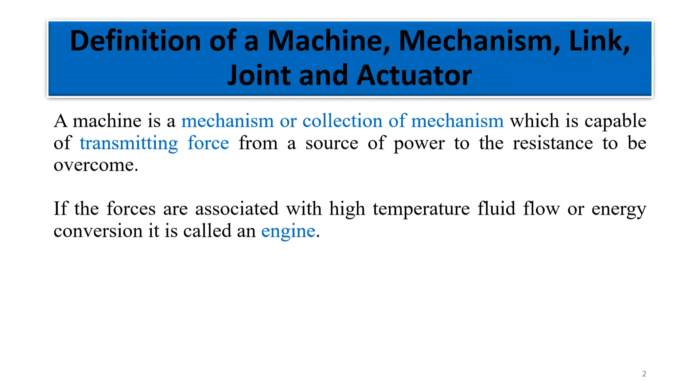Now, what is a mechanism? We have looked at the definition of a machine, and we said that a machine is basically made up of a collection of mechanisms. A mechanism can be considered to be a rigid part. And if we say a rigid part, we are saying that the body doesn't deform. Your basic mechanics. So any rigid body doesn't deform. And they are not only rigid bodies, but they are arranged and connected such that they can produce the desired motion of the machine.

Mind you, we said that the machine has one or two mechanisms or a collection of mechanisms to transfer power from one source to the other. Now, a mechanism, we say, is rigid parts that are arranged and connected such that they can produce the desired motion of the machine. That means that every machine is designed for a particular purpose. So if the purpose of the machine is to move a vehicle forward, then the mechanism should be able to carry out that purpose. We don't design mechanisms for design's sake. Whatever we design has a particular function that it must perform.

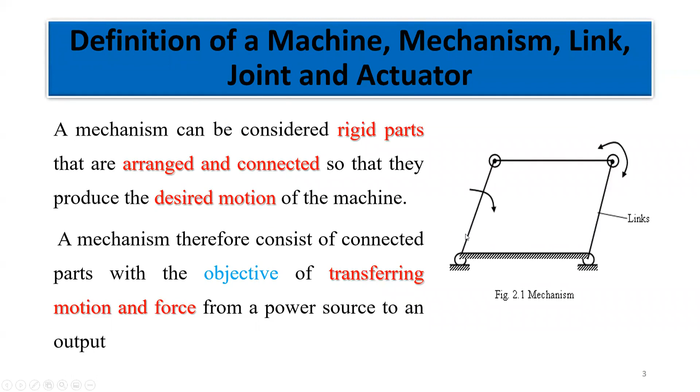We say a simple link is a rigid body that contains only 2 joints, which connect it to another link. E.g., a crank, which is able to complete a full rotation about a fixed point. So for this one, if we say from this point up to this point is the only link that we have, then this is called a simple link. But if you consider the other links in addition, then we say it is a complex link.

So a complex link is a rigid body that contains more than 2 joints. The main difference between a simple link and a complex link is the number of joints available. If you count the number of joints and you have 2, then you can say this mechanism has simple links. If you count the joints and they are more than 2, then this mechanism has complex links connected together.

So examples of motions are sliding. When we say sliding, an example is a piston in a cylinder. When we talked about engines, we said we have pistons that are reciprocating. When we meet on Friday, I will try to bring a simple engine for us to look at and see how that mechanism works. So on Friday, we'll look at what a piston is.

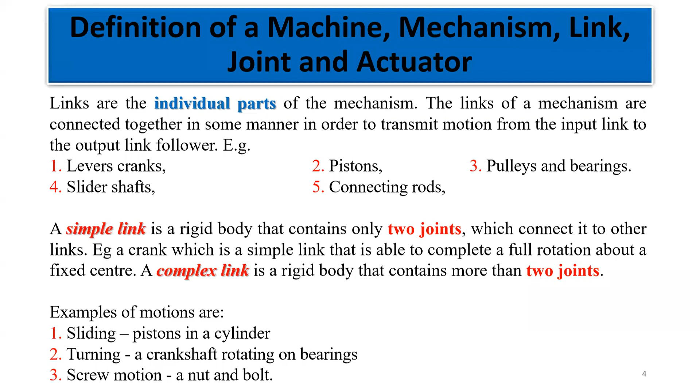Another one is turning. An example of turning motion is a crankshaft rotating on bearings. We also have screw motion, and an example of that is a nut and a bolt. So all those are examples of motion. So on Friday, we'll look at what a piston is, what a crankshaft is, and how those are connected to achieve the desired motion in engines.

So we have talked about the fact that a link is made up of two types: the simple link, which is made up of two joints, and the complex link, made up of more than two joints. So we look at what a joint is, so that if we are told to classify a link, we can easily know. Because if you know a joint, then we can know whether we have two joints, three joints, 4, 5, and so on and so forth. So a joint is just a movable connection between links that allows relative motion between the links.

Joints are divided into two. We have the primary joint, which we can also call the full joint. And then we have the higher order joint, which we can also call the half joint. The full joints are divided into two.

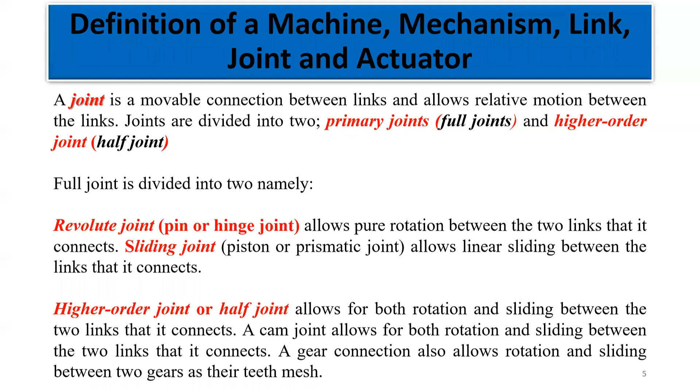So let's move on to what we call a linkage. We say a linkage is a mechanism where the links are connected to form a chain with one of the links fixed.

And we also define a mechanism as a connection of rigid links to perform or transmit motion or a force. So if we have a mechanism where one of the links is fixed, then we have what we call a linkage. Now the fixed link is called a frame, because it exhibits no motion, and it serves as the reference for the motion of all other parts.

Yes sir, please, Wanda was asking a question: is the actuator the energy producing component or the rotation producing component? We say the actuator is the one that produces the energy. So it means that any component producing the rotation in the mechanism is not actually the actuator. That energy will be transferred to the links, so the links are the ones that are going to produce that rotation, sliding, and all those things.

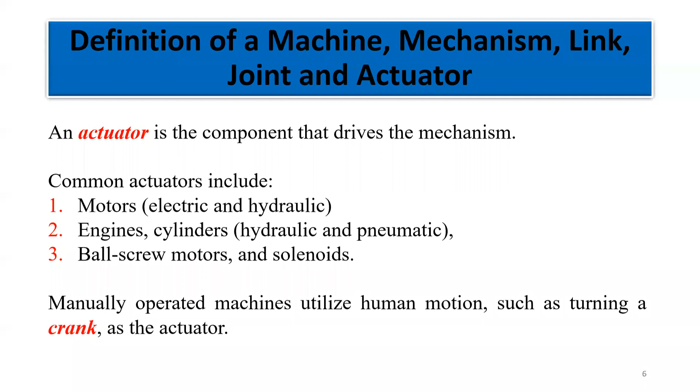So we say for a linkage, it's a mechanism where various links are connected together to form a chain. So if we look at figure 2.2, for instance, this one we are calling a slider crank chain.

The component one are the fixed points or fixed mechanism, so these ones are called the frame. Now component 4 is the slider. It is sliding on component 1.

And then component 3 is called the connecting rod. And then component 2 is what we are calling the crank. So this is a kinematic diagram of an engine.

The crank rotates, and when the crank rotates, it causes component 3 to oscillate. And because component 1 is fixed, component 4 will begin to slide back and forth. So you realize that it will be moving back and forth, back and forth.

Now, an example of a linkage is the slider crank mechanism, commonly used in petrol engines or internal combustion engines. So if you look at your vehicles, then we have a mechanism that we call a slider crank mechanism there. Without that mechanism, there's no way the vehicle can move.

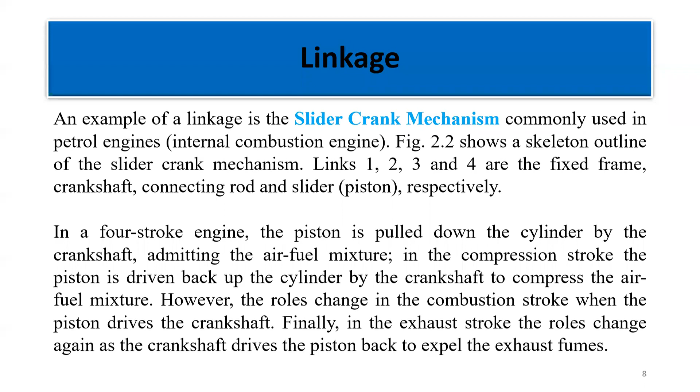So that is basically what we mean by the slider crank mechanism. On Friday when we meet, I will show you a typical example of a slider crank mechanism, and we'll quickly look at what I have explained here - practically what we mean by the intake stroke, the combustion stroke, the compression stroke, and then the exhaust stroke.

Another type of linkage is what we call the 4-bar chain. A 4-bar chain is what is shown on the right-hand side of the slides. The 4-bar chain consists of 4 links, with link 2, 3, and 4 being movable as link 1 is fixed.

So anytime you see a line with inclined lines beneath it, then we say those ones are fixed. Then link 2, 3, and 4 are now movable.

Figure 2.3b shows the 4-bar chain operating as a double lever mechanism. An example of a double lever mechanism is what we call the windscreen wiper. Those of you who have seen the wiper of a vehicle realize that it moves side to side. The mechanism driving that windscreen wiper is what we call the 4-bar chain, or the double lever mechanism.

Link 2 and 4, their lengths are constrained so that they can only oscillate backwards and forward, whereas the wiper is moving side by side. A practical example is the windscreen wiper.

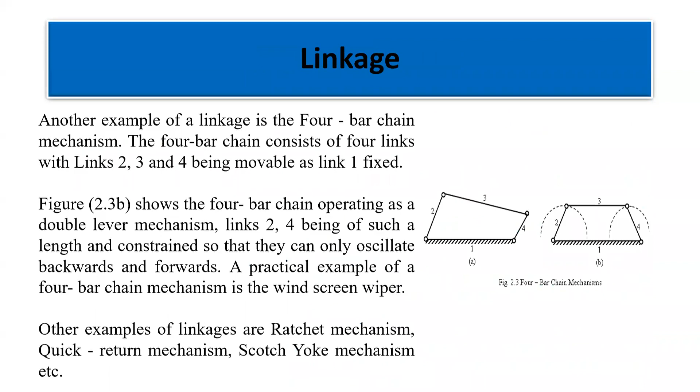And then we have what we call the cam mechanism. But before we move on to the cam mechanism, for the slider crank mechanism, you realize that we were saying link 1 is fixed. We can as well fix link 3, and then fix link 2. Those ones will give us different mechanisms - we'll look at it when we move forward.

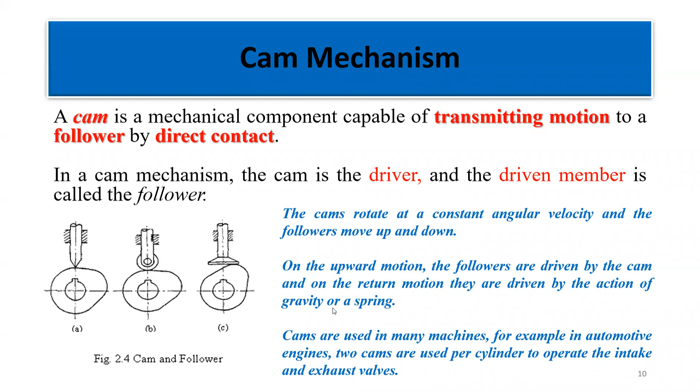So we have what you call classification of cam mechanisms. Now we say CAM mechanisms can be classified by their input and output motion, the configuration and arrangement of the follower, and the shape of the CAM.

The follower configurations in Figures A to D are named according to their characteristics. So we say Figure A is a knife edge CAM mechanism, because if you look at this follower here, it is shaped as if it is a knife. That's why we are calling it a knife edge CAM follower.

Now if you look at B, you realize that the follower is shaped like a roller. So we say it is a roller CAM mechanism. And if you look at figure C, the follower is shaped like a flat surface. So we say it is a flat faced CAM mechanism.

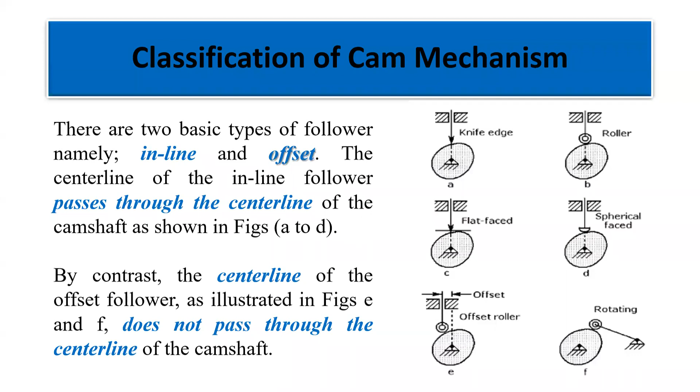An offset follower. If you look at E and F, you realize that the center lines are not in line. So we say they are called an offset follower. So we say the center line of the offset follower does not pass through the center line of the camshaft. So basically, those are the two types of followers that we have: the inline follower and then the offset follower.

So we say followers are typically spring loaded to maintain constant contact with the shaped surface of the cam. But gravity constraint is still an option. Huh? But normally we don't want the follower to drop by gravity. We want to have control, right? So we normally prefer the spring loaded. So the spring will control the movement of the follower.

Any question on the cams before we move on to the gears? Hello? Hello? Hi. Yeah, I'm asking if there's any question on the cams before we move on to the gears.

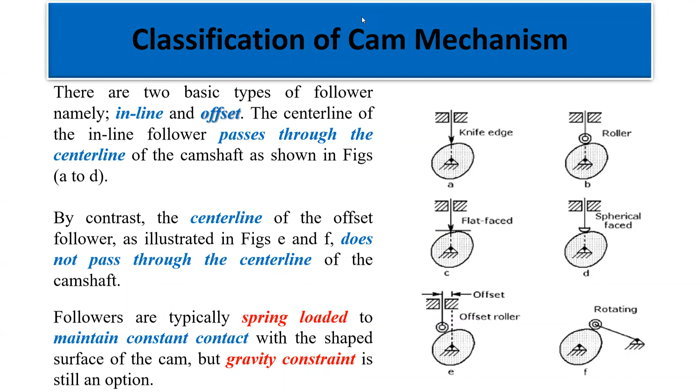Okay, if there's no question, then we say gears are used to transmit rotary motion and power from one shaft to the other with a constant angular velocity ratio. Gears have the advantage of providing positive drive without slipping, and permit high torques to be transmitted. Furthermore, gears are adequately lubricated to operate at remarkably high efficiency over a wide speed range. Gears can be used between shafts that are parallel or inclined towards each other.

And when gears are in mesh, we say the bigger one is called a wheel, and the smaller one is called the pinion. So basically, when we say you want to transmit rotary motion or power from one shaft to the other, then the most efficient one is what we call the gears. Even though we have a belt and pulley there, the belt and pulley we say have some losses. It is not as efficient as the gears.

Because with the gears, there's nothing like slipping. But with the belt, we have what we call slipping. And that slipping reduces the efficiency at which the motion can be transmitted. And then when we want to transmit high torques, we say we go for gears. And then another advantage is that whether the shafts are parallel or inclined, you can go for gears. But with the pulley and belt, that flexibility is not available. So gears are very, very important when it comes to transmission of rotary motion.

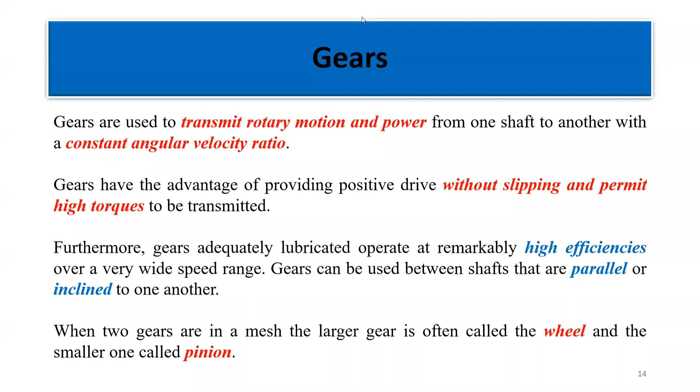Now, this is what we mean by parallel shaft, inclined shaft, and the non-intersecting shafts. So these are examples of gears in mesh. In some cases, the desired reduction in angular velocity is too great to achieve using only two gears, so several gears are connected to give a gear train. And you will say that gears can be used to transmit higher torques. In cases where these are very huge, you can't only use your two gears, you must combine the gears. So we can have as many gears as possible.

And that is what is used in the gearbox. If you pick a gearbox, you realize that it has so many gears in mesh. Because maybe the torque or the speed is very high, and the speed that we need to drive the mechanism is too low. So you see, for us to achieve that, we use the gears to reduce the speed that is coming from the actuator.

And the actuator can either be an engine or it can be a motor. So if the speed coming from the motor or the engine is too high, then we use what we call a gear reducing gearbox. We reduce the speed up to the speed that we want. If that is done, then we can actually use it for driving our mechanism.

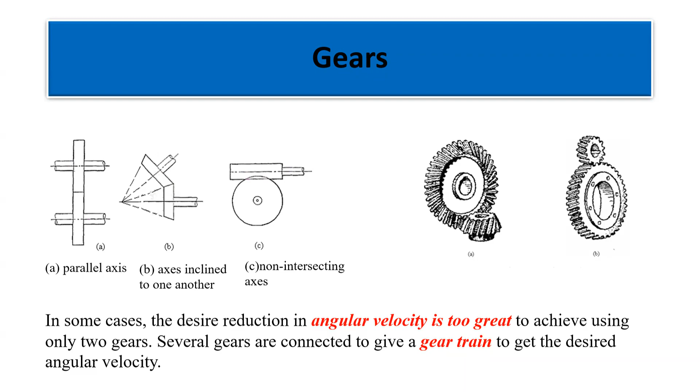And then basically we have so many types of gears.

Please, someone wants to join. Oh, I've admitted all of them now.

So we say the spur gear is used to transmit motion between two parallel shafts. So for instance, in this figure, if you draw a line through the axis of the shaft, you realize that the center lines are parallel to each other. If we have such a case, then the best option is what we call the spur gears.

And then we also have what we call helical gears. That one is used when we want to transmit motion at an acute angle rather than at 90 degrees. Rather than at 90 degrees. So if you look at this one, for instance, if I draw a vertical line through the axis, the angle is 90 degrees.

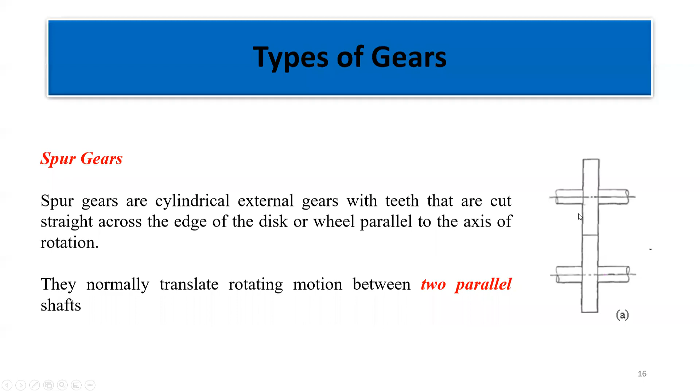Now if... hey, too quiet. Who is that?

So we say that teeth of the helical gears are cut at an angle rather than parallel to the axis.

That boy, you're making noise.

And these ones help in reducing the noise. And also help in having...

Hey, those talking. Who are those? Can you please mute all of us? That boy, you're making noise. And you're mute.

Yeah, so if we want a reduced noise, then we go for helical gears. If you want a smoother drive, then you go for helical gears. And if you want your gears to have a prolonged life, then we go for helical gears, as well as driving heavy loads. Because these teeth are cut at an angle, we say these helical gears produce what we call an axial force component on the shaft bearing.

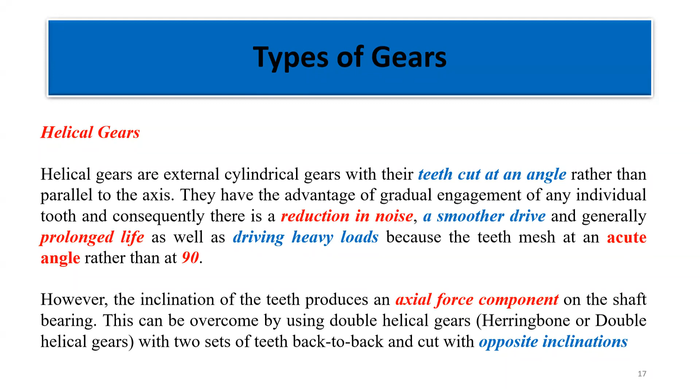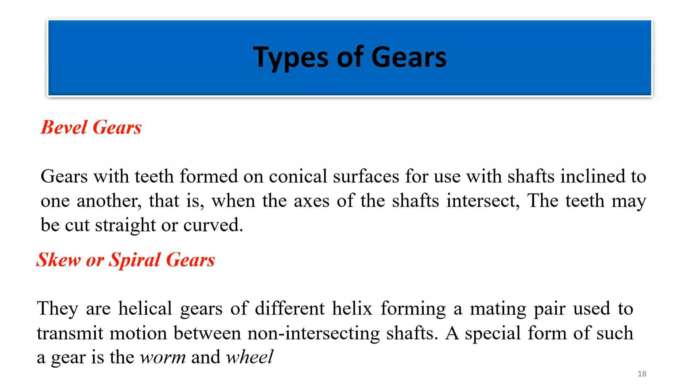So in order to overcome that, we have what we call herringbone or double helical gears. If we have such a mechanism, it means that the teeth are cut opposite to each other. So those forces will cancel out, because if one is positive, the other one will be negative. So they cancel out, and we eliminate the axial force component.

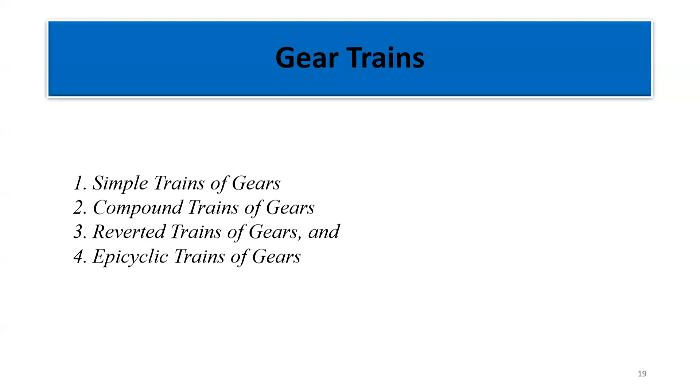And now we speak about trains. If we say gear train, it means that we have a number of gears in mesh, like in the gearbox. So we have a simple train, compound train, reverted train, and epicyclic trains. A simple train, we say each shaft has only one gear. It's called the simple gear train.

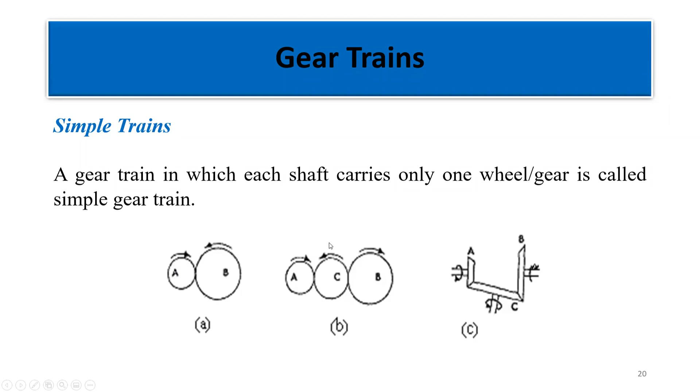So if we have a number of shafts, and each shaft is carrying only one gear, then we say we have a simple gear train. Gear A has only one shaft, and there's only one gear mounted on it. The same for gear B. For this one too it is the same, and those ones in 3D form, this is how it looks.

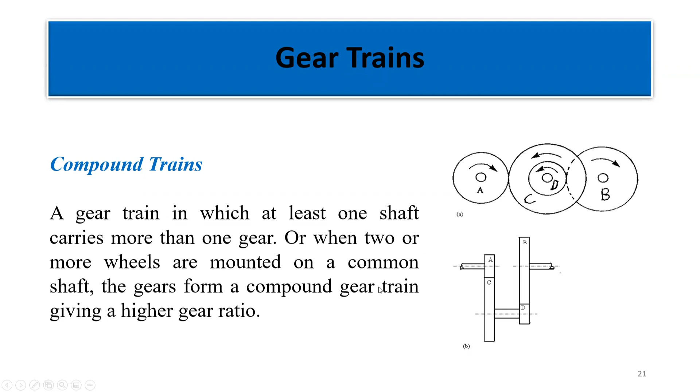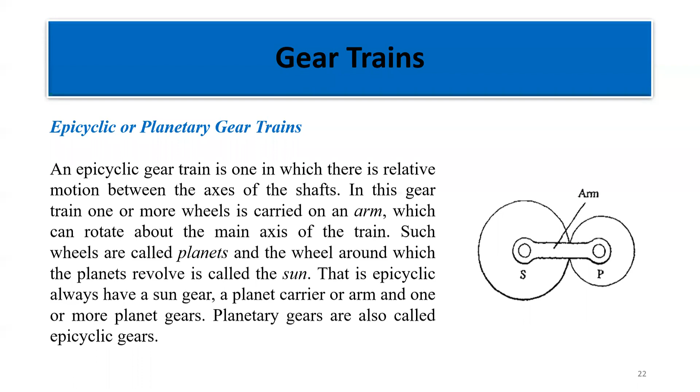So if you look at the solar system carefully, I think those who invented this one looked at the solar system, how the solar system operates, and then they used that same knowledge in designing the planetary gear trains. And if we talk about compound planetary gear trains, then it means we have a lot of them mounted in the mechanism.

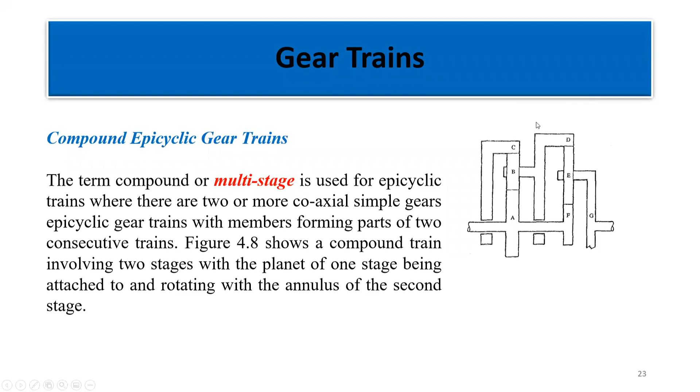Hello, sir. Yeah, hello.

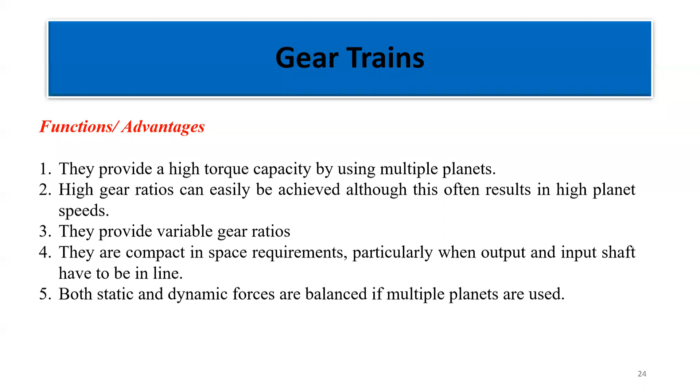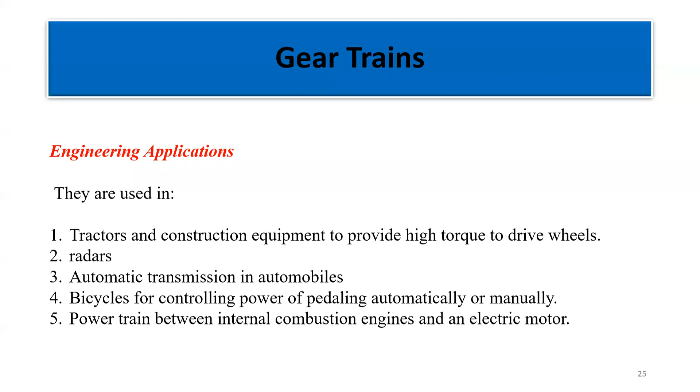And then some engineering applications are tractor and construction equipment, automatic transmission in automobiles, bicycles for controlling power, and then powertrain between internal combustion engines and an electric motor.

Sir. Hello, sir. Yeah, hello. Please, the gears, are they classified according to their functionality or the geometry of their respective teeth? Normally, we look at the teeth for its classification. And then sometimes even how the shafts are mounted. You see whether the shafts are inclined to each other, whether they are at right angle, whether they are at acute angle, whether they are parallel to each other. All those are the various ways of classifying gears.

So we say kinematic inversion. So if, for instance, one link is fixed, and then we decide that fixed link we are going to unfix, and then we fix another link, then we say we have done what we call inversion. So in the use of mechanism, a link which was originally fixed is now allowed to move. Another link becomes fixed. Then the mechanism is said to be inverted. The inversion of a mechanism does not change the motion of its links relative to each other, but does change their absolute motion relative to the ground.

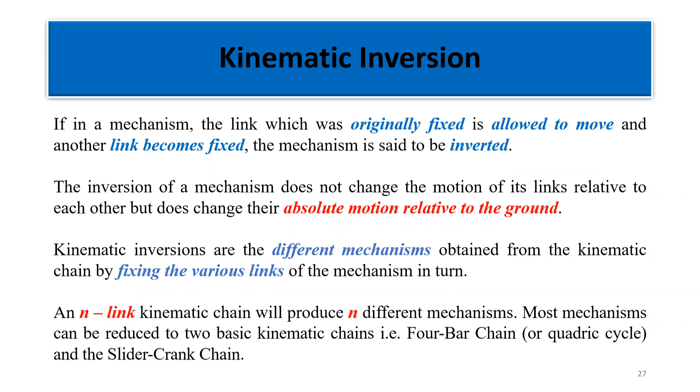Most mechanisms can be reduced to two basic kinematic chains: a 4-bar chain and a slider crank chain. For instance, if we look at this mechanism, let's say link 1 is fixed. Now if I decide to no longer fix link 1, but instead fix link 4, I will obtain a different machine, which we call another kinematic chain. It will be different from the one we had before, because the output and motion of the machine will change if we change the fixed link from one link to another. This mechanism has 4 links, meaning I can fix 4 different links. That's why we say an n-link kinematic chain will produce n different mechanisms. By fixing different links, we get different mechanisms produced. That is what we mean by a kinematic inversion.

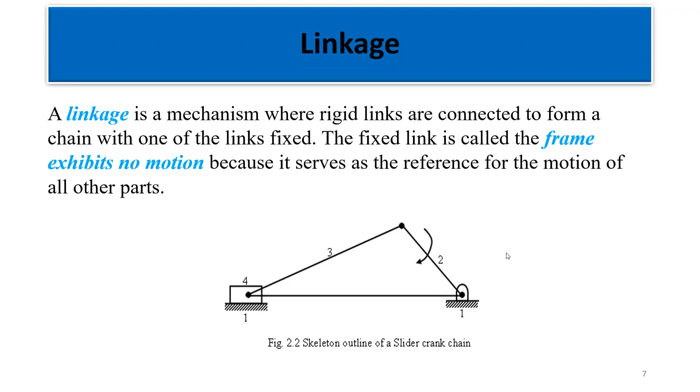Now we also have what we call degrees of freedom. The degree of freedom of a body gives an indication of the number of independent variables needed for measuring or determining the type of relative motion permitted at a pair. So degree of freedom tells us how the mechanism can move.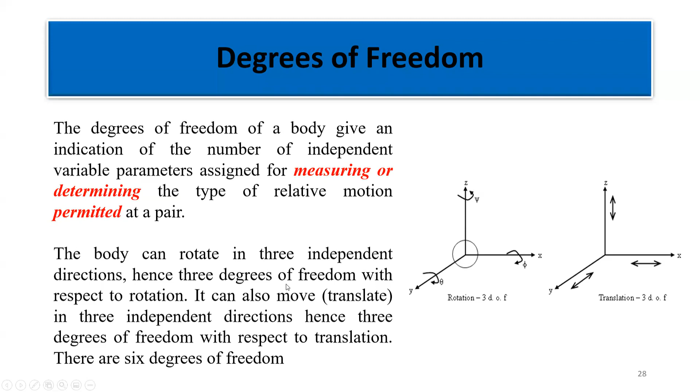A body can rotate in 3 different independent directions, giving 3 degrees of freedom. In this mechanism, there is rotation in the Z direction, rotation in the X direction, and rotation in the Y direction, so it has 3 degrees of freedom. There is also translation in the Z direction, translation in the X direction, and translation in the Y direction. Combining these, the mechanism has 6 degrees of freedom, since there is both rotation and translation in the Z, X, and Y directions. Putting all of them together gives 6 degrees of freedom.

Now, how do we calculate degrees of freedom? The mobility of a mechanism is the number of degrees of freedom, determining how mobile a mechanism can be. So how do we calculate that? We use what we call the mobility criterion, and that formula is M equals 3 times (N minus 1) minus 2J1 minus J2.

So what is M, what is N, what is J1, and what is J2? M is the mobility, or the number of degrees of freedom. N is the number of links. J1 is the number of full joints, and J2 is the number of half joints. We have already discussed half joints and full joints, and now we are going to apply this in determining the mobility of a mechanism.

In determining the mobility of a mechanism, care must be taken when applying the equation, because there are a number of special mechanism geometries for which it will not work.

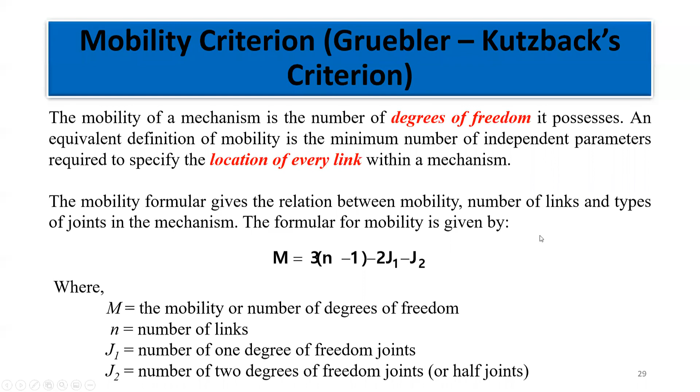So quickly copy this one as an assignment. When we meet on Friday, we'll quickly look at how we are going to apply this formula in calculating the mobility of mechanisms. So we'll quickly go and read it and try to understand what we mean by mobility of a mechanism. When we meet on Friday, we'll go through some problems together, and then we'll move on to kinematics, where we'll look at the analytical method as well. So we'll quickly write this one as the assignment of the day.

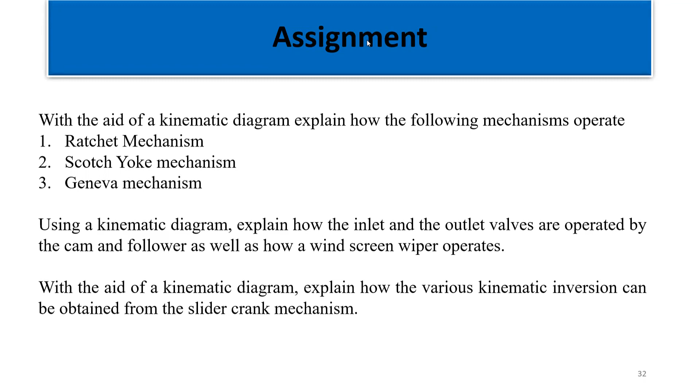Already I've given you one assignment on balancing. So please, when taking this one - this one is 2 weeks from when you submit the one for balancing. Agreed? So next 4 weeks. No, it's said 2 weeks after we have submitted the balancing one. 3 weeks - so this Friday, next is 3 weeks. The next 2 Fridays, I will take this one.

So we will look at these examples, how we will calculate the number of degrees of freedom of all these mechanisms on Friday. So if you go, you can just try your hands on it, so that when we meet, we look at it together. Agree? Agree. So we'll look at it so that when we meet on Friday, we look at it together.